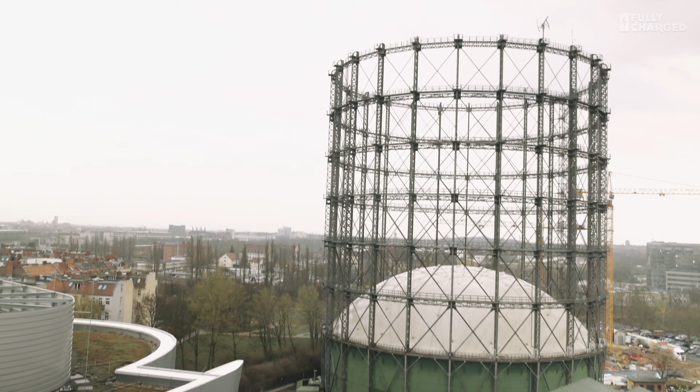The European Energy Forum was started in 2007 when a property company acquired a 5.5 hectare site in the centre of Berlin that was once the city gasworks. I met Benjamin Melcher, who is part of the team responsible for running the campus, and he's been explaining the success they've had in making a sustainable district for businesses here at EUREF.

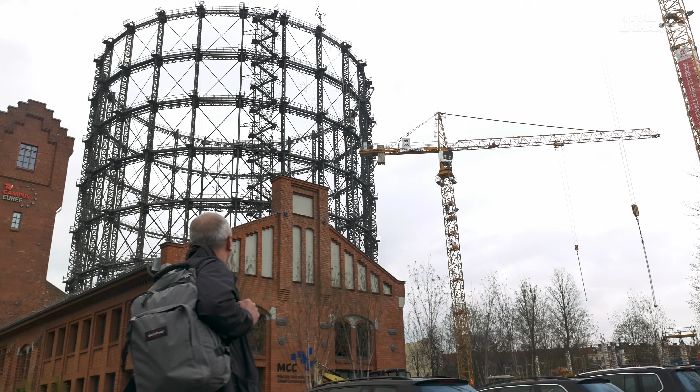Tenants wanted green energy to run the buildings, but they didn't want to pay more than normal. EUREF have installed enough renewables and a biogas heating and power unit and reached their zero carbon goal back in 2016. So what the government has set for Germany to reach by 2050, you've already achieved. Yeah, they said you have to have numbers, you have to reach them, and these have to be carbon neutral. So this is what we're doing here.

We have here a decentralized power plant, and this power plant is driven by biogas, and we're reaching the equal price as normal heating and cooling from other companies.

Right. You know, working with your neighbor, and knowing your neighbor is fantastic. Yeah. You know, to say, hi Robert, nice to meet you. You know, we earned some money together. This is fun. Yes. Yeah.

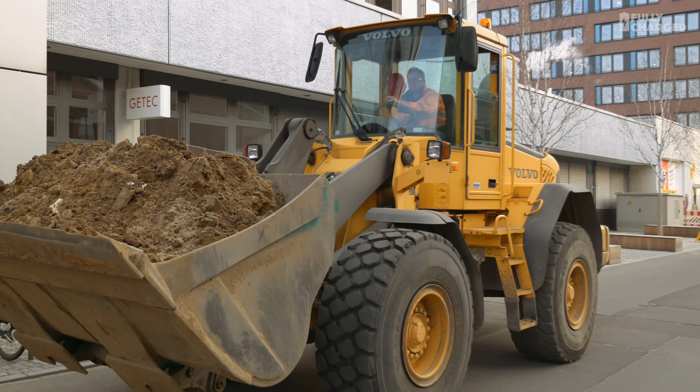In our real estate development, we have here 165,000 square meters, and we already have done 65. So we're in the middle of our project so far. So there's a lot more to come. There's a lot more expansion.

I think that's the real crucial point, is that you're supplying what any building developer could supply to their tenants, which is safe, warm or cool, well lit, and it would generally be powered by fossil fuels coming in. You wouldn't even ask, you wouldn't even think about it. It's just normal. And what you've done is exactly the same for the same money, but with a completely different power infrastructure, which is really important. That it's economic.

It makes economic sense. If people are changing small things, but if a lot of people are changing small things, it's a big thing. No, that's fantastic.

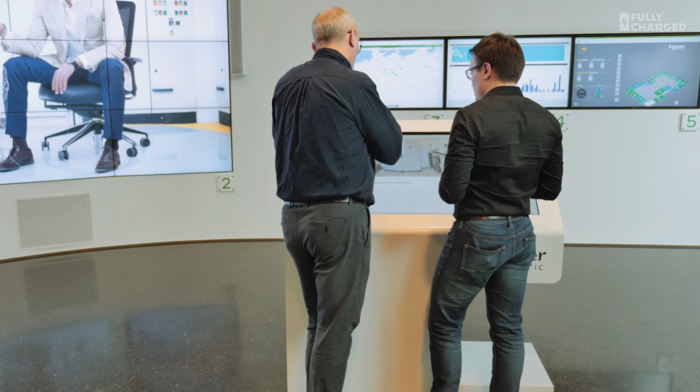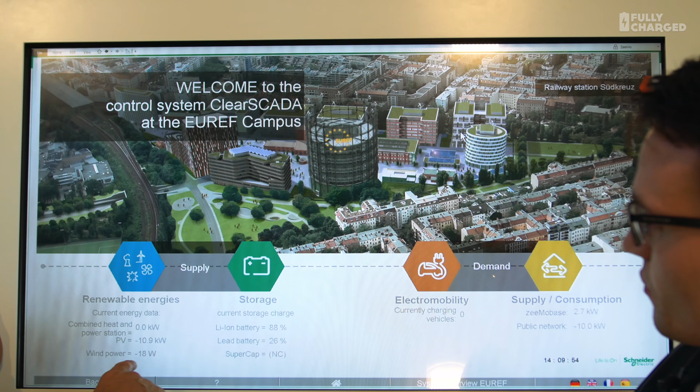We then met Roman Krentz from Schneider Electric, who have a massive office and a research centre at EUREF. He showed me how the microgrid on the campus operated. So with this, we can see how the microgrid works here on the campus. Right now we have it in operation, in service as a micro smart grid. At the moment we can see that the photovoltaics, the solar, is giving 11 kilowatts. And then the storage, does that imply that 88% of the battery is charged?

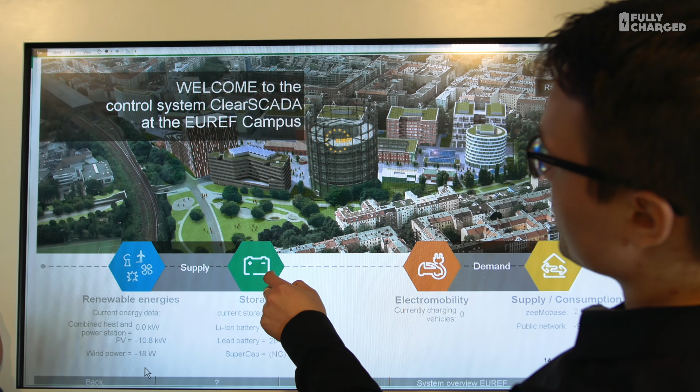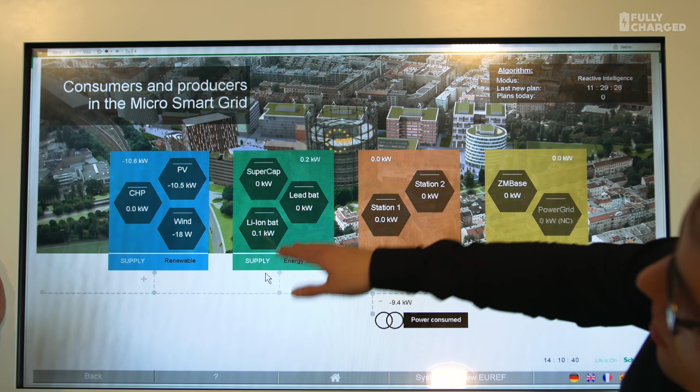It's charged 88%. So we can go here deeper. Oh, so you can go deeper into the system. So here you see another overview of the supply and demand side. Right now we see we don't have any demand. Typically we would charge the battery right now, but you saw before that the battery is already at 88%, so it wouldn't make sense to charge it way more.

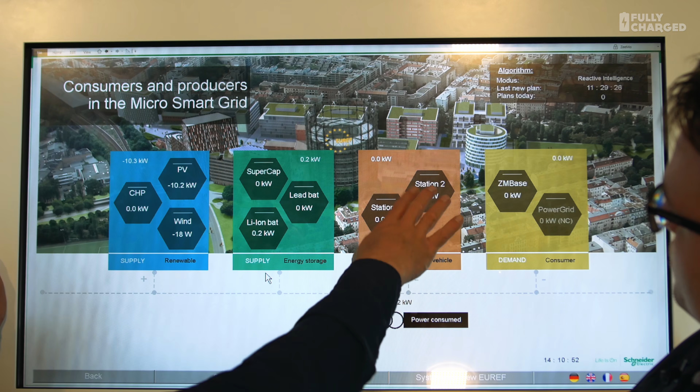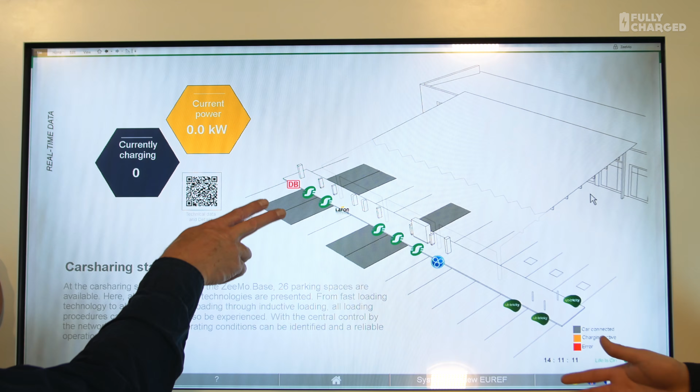These are the car chargers. At the moment, no one is charging on those. So that's the overview of the charging stations, and we can also go deeper and see where the cars are staying. Right. So that's what that implies. There's a vehicle there. So these ones are vacant. These spaces are free. In the whole we have 26 charging points here, and also some inductive plates.

We want to make sure that the energy we produce here on the campus is also used by filling up the cars, or used by other buildings here on the campus, so it doesn't even go into the upper grid.

Right. So all these things, in time, you could have far more batteries, for instance. You've got the room, presumably, for more solar. Yeah, everything is scalable in this system. So yeah, you can have more battery systems. So we have 2 battery systems in this.

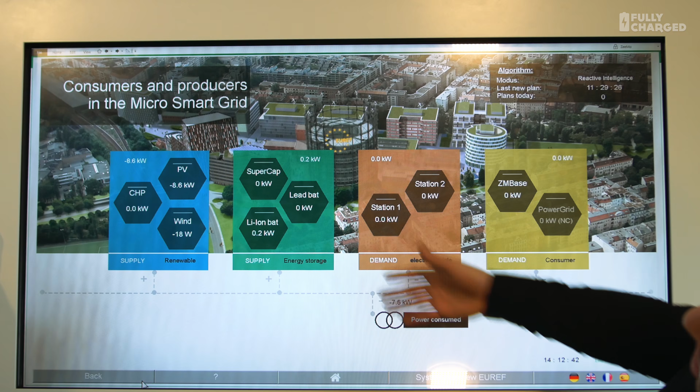This is really an overview of what the system tracks. So you're trying to balance. So what the solar's producing, you try and make sure that the car is consuming that, but not more than, or less than, I suppose. And the next step is the proactive intelligence.

Right. So the smart grid we have here, we have also in a smaller version at the railway station Südkreuz. We are connected to them. So that's another microgrid over there. Another microgrid, which is a bit smaller, yeah, has not so many production sites. So you see an overview of the station.

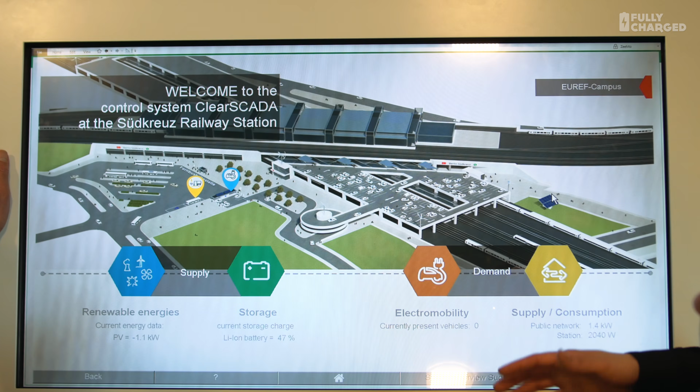The railway station. You have here, for example, the e-bus, the inductive charging e-bus. You have a little PV station. You have a battery system. And there's a battery system within that unit there, right? There, behind the store. And then all the car chargers in the car park. Yeah. And it works like this system here. And we can also just give a remote control from here, and we don't need to drive there.

Fantastic. Wow, very good. Excellent. Thank you. Thank you very much.

So this table we have here is a simulation table. We can show the visitors how a micro smart grid really works. So in the past we had energy production by coal, we had energy production by gas, and more we're getting production by wind, by sun. Furthermore, we still have the demand by households and industry.

Right. And what we do in a micro smart grid is we put our micro smart grid controller here, and the controller catches up the flows in our micro smart grid and knows where the energy comes from and where it goes. And so we only have an exchange with the upper grid if it's really needed. Yes. So, for example, we can have scenarios where we go maybe 10 years further, and the production rises because we have more sun or more wind, and the micro smart grid itself will just keep the energy inside and not get more energy from outside.